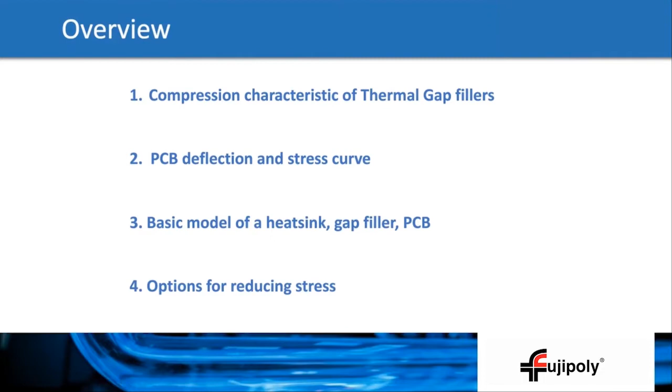Whenever we discuss thermal interface materials, it's always good to define what exactly is a thermal gap filler. Thermal gap fillers are a thermal interface, but they're unique from something like a phase change or a grease. In the case of phase change and grease TIMs, these are basically designed to reduce contact resistance only. A thermal gap filler is designed to fill in a gap that can vary due to tolerance. This means actual stress created during the compression can vary, and in most cases can be higher than desired.

Gap fillers are typically not used in applications with a fixed force like a spring-loaded heatsink. They are used in applications where there is a gap. The gap is controlled, and there is some tolerance based on the component and assembly tolerances. The actual load or stresses are dependent on the actual gap filler used, specifically the starting thickness. General rule of thumb is the higher the conductivity, the less compliant the gap filler. That being said, gap fillers can come in a variety of form factors, but all have some limitation and characteristics that should be understood.

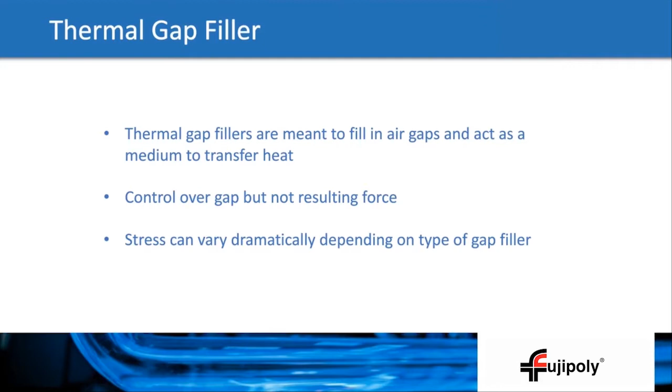Generally speaking, thermal gap fillers come in three types. The softest of these are the dispensables, or what are also called form-in-place materials. Form-in-place materials are an attractive option because they're essentially a fluid or a viscous material. They create virtually no stress. And I say virtually no stress because even they have their limits as to how thin you can go.

These dispensables can come as a curing or non-curing type. Curing types are essentially one or two parts, and they either cure at room temperature or they can be cured at higher temperature to reduce the cure time. Customers are responsible for the mixing in the case of a two-part and for the dispensing.

Dispensable gap fillers require equipment and procedures put in place to ensure the form-in-place is cured properly, if it is a curing type. Some materials don't require curing. Dispensing procedures must ensure no air is trapped in the material and that the correct dispense shape is created before assembly to ensure even contact.

One popular dispensing shape is what's referred to as a Hershey kiss. This dispensing tip starts off close to the surface and lifts as it's dispensed to apply what exactly looks like a Hershey kiss. Of course, the actual geometry of the dispensable material will depend on the application. There are also current limitations on the conductivity of dispensable type gap fillers.

Another popular type of gap filler is what's referred to as a putty or a putty pad gap filler. These gap fillers come in a pad form, so no need for any special equipment. These pads come in a specified thickness, and because they are already formed, there's no concern with air trapped inside like you would have with a dispensable material. They are more of a viscoplastic material. They tend to have a very small to no elastic component. This means there's no bounce back. The plus side is it can be pressed well beyond the 50% mark as opposed to some viscoelastic materials.

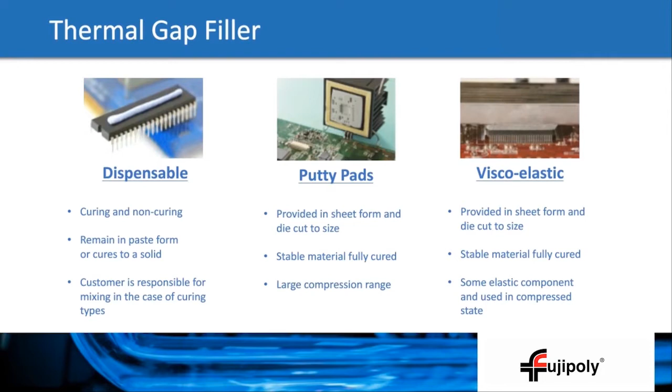If you made the decision to use a thermal gap filler in your design, the data sheet is typically where you'd want to start. Data sheets will typically have a stress strain curve or some stress strain data in a table or modulus value. Oftentimes this data is only for one thickness. Stress strain will change with the thickness. Thicker materials tend to be more compliant. The thicker you go, the more area there is for the material to deform. Another key point to bring up about the stress strain curve is that they are not linear, at least not for the range of compression most customers are working in.

Other factors to be considered when looking at a data sheet is the rate of compression. Gap fillers are highly dampened, so the rate of compression will play a big part on the peak stress. Stress is at its highest when the pad is undergoing compression and begins to relax immediately after. Communicating this to the manufacturing team is very important.

Boundaries also play a big part. Compression testing often uses platens that are the same size as the gap filler. This means the material will deform and will be forced outside of the load path. If the surface compressing the pads are larger, then the pad will require more force to get to a given compression. This is one reason you will find that the data sheet varies from the actual. You want to have a good understanding how thickness, compression speed, and relaxation over time plays a part in the stress on the PCB, especially when you're looking at very sensitive devices. So let's look at some stress strain curves for some typical thermal gap filler materials.

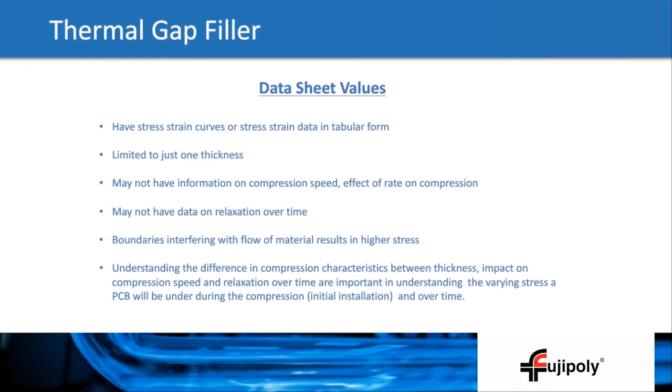On this slide, we can see the stress strain curve of a thermal gap filler. On the right, you can see the platens used to perform the compression testing. As I mentioned previously, the platens are the same size as the pad. There's nothing wrong with this test. It's an actual ASTM test, specifically ASTM D575. But unless you have an application where the top and bottom surfaces are the same size as the pads, you will see the stress strain curve diverge, typically about 30 to 35% compression. This is due to the fact that the gap filler in your application will remain in the load path and will require more force to get to a given compression.

Something else about the stress strain curve is the fact it's not linear. So using a single modulus value to describe the compression will often be inaccurate. You want to know where on the stress strain curve you will be working. Compressing beyond that point will cause the gap filler to densify and cease to flow. At this point, it's essentially a rigid material.

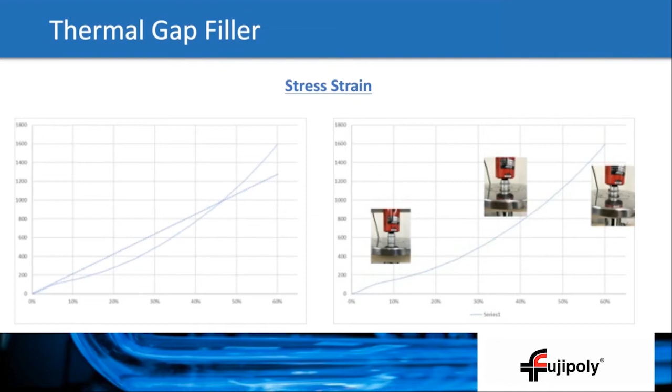Previously, we mentioned that form-in-place gap fillers are very popular because they do not create too much stress. They are a great option for very sensitive devices or assemblies that require very low stress. The stress created by a form-in-place is often negligible. They are polymer-based, usually silicone or some other synthetic polymer base, but they are not cross-linked or have very little cross-linking, so they have no tensile strength.

For TIMs like grease, the particle size tends to be much smaller. This is why you can go to very thin bond lines with materials like thermal grease. Unlike gap fillers, the limit to how thin you can go has little to do with the original thickness you start with. Most form-in-place materials will specify how thin you should go. It is important to know the limits of these form-in-place materials. Form-in-place materials may give the impression they are essentially totally compressible down to almost no bond line. This is not the case. Using them in an application that is very sensitive to stress and compressing it beyond the point where the particles are bottoming out will lead to damage to the PCB and the components.

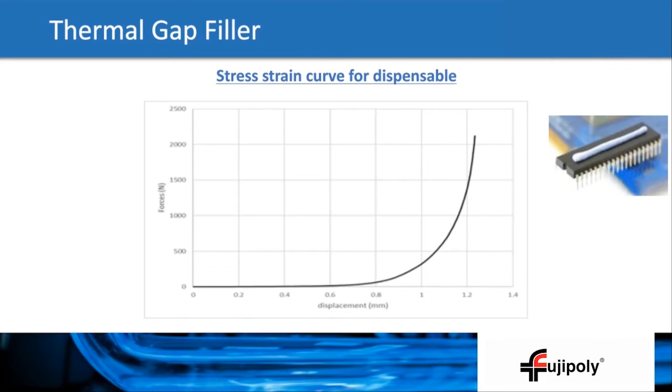In a lab environment, keeping the compression speed low might be okay, but in a production environment, that might not be an option. One of the first things we ask customers when they comment on stress created during compression is what speed is the pad being compressed at? Is it controlled? If it is not, can it be? If it is controlled, can we slow it down? Slowing the compression down usually fixes the problem, but in some cases it is difficult to control the rate of compression. Any procedure changes to address this usually means slower throughput for the manufacturing team.

Another option is using a fixed load to compress the gap filler. Gap fillers under a given load will creep. The creep in viscoelastic materials is reversible to a certain extent. There is some compression set, and the amount of set will depend on the type of gap filler. Putty gap fillers have a creep that is not reversible. The compression set is essentially 100%. Putty pads are not reworkable. Once they are compressed, they should not be reused if there is some rework. Even viscoelastic pads should be replaced if there is service required.

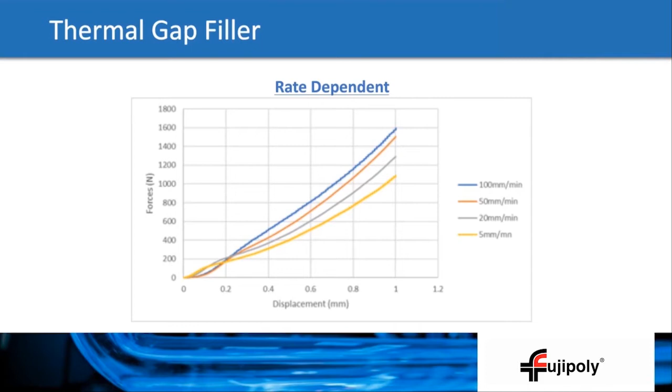Important to remember the forces are highest during the compression and generally relax once there is no longer any further deformation. Managing the compression from initial to the target percent compression is critical in ensuring the assembly does not undergo more stress that will cause damage to the PCB or solder joints.

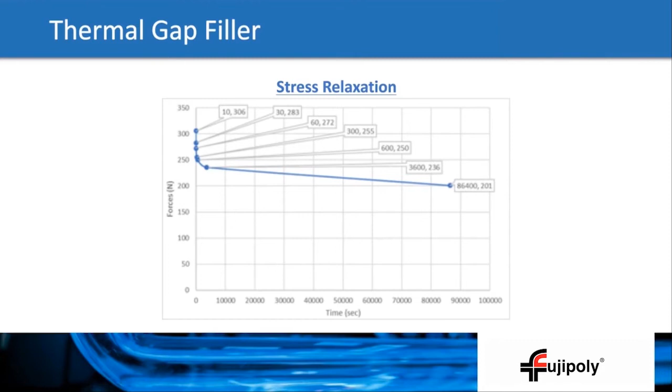We spent some time discussing the compression characteristics of thermal gap fillers, but in all our discussions we considered the compression surfaces rigid. Basically, metal platens that would only deflect under very high loads, far above the loads that are produced by a gap filler material under compression. Of course, if we are interested in the compression characteristics of an elastomer, we want to make sure we are not introducing deflection from the test system itself.

But the reality is that most gap fillers are compressed onto a PCB, and PCBs are very flexible. In fact, many customers are surprised at how easy it is to deflect a PCB, and fortunately how much it can deflect without breaking. PCBs, for the most part, except for specialized PCBs for microwave applications, are made of a woven fiberglass and epoxy resin. Mechanical properties can change based on the supplier, but generally speaking, an FR4 PCB can bend quite a bit before you reach the yield point.

The details on how and when a PCB will break are beyond the scope of this webinar. Your PCB supplier would be better suited to answering those questions, specifically on flexing and yield strength. In the case of this test, we decided to illustrate the flexing by doing an application-specific test to see how much a single FR4 board will deform. This is something a customer can easily do as well.

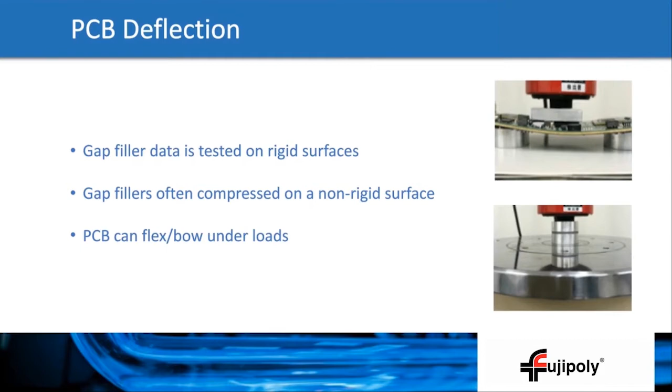For this example, we had PCBs made using FR4 that is 060 thick, about 1.5 millimeters, and a standard half-ounce copper ground plane. We did not populate it with components. In this case, we're just focusing on the deflection of the PCB only. The components are obviously the critical part of any PCB, but the type of components and layouts can vary from one application to the other, so it was very difficult to standardize.

There's always concern with localized stress on the solder joints. We often find the deflection of the PCB plays a big part in solder joint failure. The rigid solder joints cannot flex along with the very flexible PCB. This creates stress strains that can be difficult to predict even with advanced modeling.

In this experiment, we did a basic 4-point test. The PCB is held by standoffs spaced at 100 millimeters by 100 millimeters. We use a 27 millimeter by 27 millimeter platen to act as a sort of dummy component. We record the stress strains similar to how we tested the gap fillers in the previous slides, with forces along the y-axis and deformation along the x-axis.

In this case, we targeted about a 2 millimeter deflection. We certainly could have deflected it further without actually reaching the yield point. We felt a 2 millimeter deflection is good enough for illustrating the amount of deflection you're going to see in a printed circuit board.

As you can see from the stress strain curve, the PCB flexes quite a bit. The curve is linear, at least up to here, and it doesn't look like we're anywhere near close to damaging the PCB itself. With only about 90 newtons, or about 9 kilograms of force, we get up to about a 2 millimeter deformation. In a gap filler application, the compression is a stackup of a flexible PCB and a compliant thermal gap filler. The question may be, is this too much force?

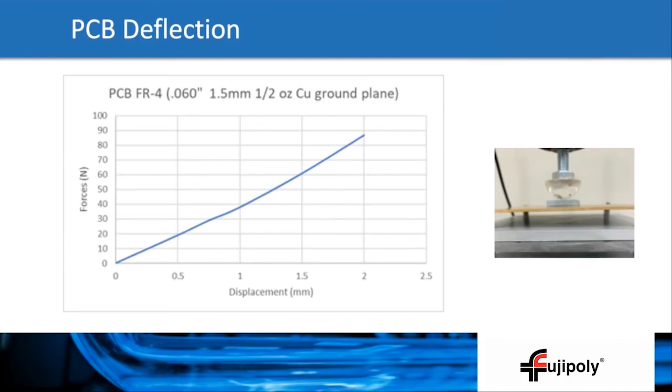So now let's take a look at the pad we're intending to compress onto the PCB, and let's look at its compression characteristic on a rigid surface, just like you would get if you compressed it using an Instron tester, or if you called us here at Fujipoly and asked us to do a compression test. Basically, a compression curve of the gap filler onto a rigid surface. We're using the same size and compression speed as a PCB test.

What we are seeing is that a very flexible PCB compared to the gap pad will dominate. So the pad is undergoing very little compression, but the PCB is still flexing quite a bit. It's almost like the gap filler itself is quite rigid. This means we're not getting down to the target compression that we intended. Not getting to that target compression is not a big concern unless there was a specific thermal resistance at a specific percent compression, but deformation in the PCB is the primary concern.

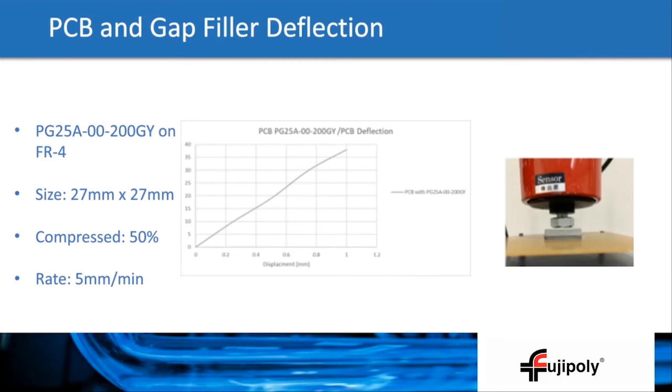We mentioned earlier that gap fillers will creep under load or exhibit relaxation at a given gap. This means the PCB will return somewhat. How much and when will depend on the gap filler's relaxation characteristics. For some gap fillers, it may not relax at all. In some cases, it may come close to, but unlikely the PCB will return to its original position. If you know the relaxation loads for the pad, you can match it up to the PCB and get the actual final resting point for the PCB. For example, if you know the pad after 24 hours will go from 150 to 50 newtons, you can figure out just where the PCB will finally rest at.

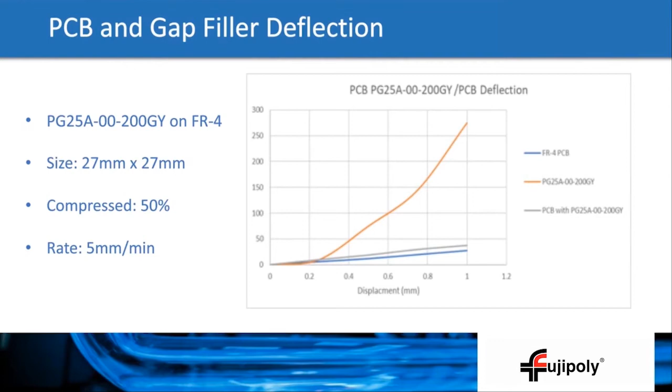Of course, this could be avoided somewhat. Planning and ensuring the standoffs are closer together will provide more support for the PCB. So we decided to try this again. This time we moved the standoffs to a 50 millimeter spacing. For a very simple test, this was easy to do, but if you have a populated PCB that is ready to go into production, this might not be an option.

Boards are packed with surface mount components and traces that are designed to maintain signal integrity at higher frequencies. Laying out a PCB is a time-consuming process. Sometimes it's not as easy as moving a BGA over 10 millimeters to accommodate a through hole, or rerouting a trace around to allow for a post to be inserted. This is why it's really important to identify components that will require thermal gap fillers and ensure they can support the compression of the pad.

In the previous example, the standoffs were 100 millimeters by 100 millimeters apart, and gave us 2 millimeters of deflection with only 90 newtons of force. This may seem extreme, but standoffs that are even farther apart are not uncommon, nor is having a PCB flex as much as 2 millimeters or more.

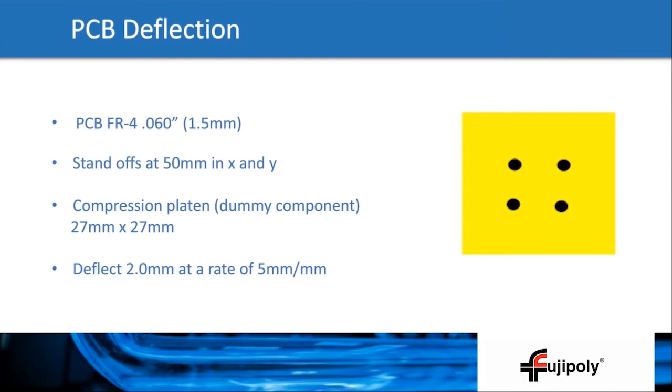So we ran the same test on that PCB with the closer standoffs. Again, it's 0.060 thick, about 1.5 millimeters, and a 1/2 ounce copper plane. We used the same platen and size, same rate of compression. Decreasing the spacing had a marked impact on the deflection of the board. The PCB under 700 newtons, or about 70 kilograms, now deflected 2 millimeters. If we get the standoffs even closer, the boards will deflect even less at a given load. Ideally, we would like to see the deflection be 0, but that's just not possible.

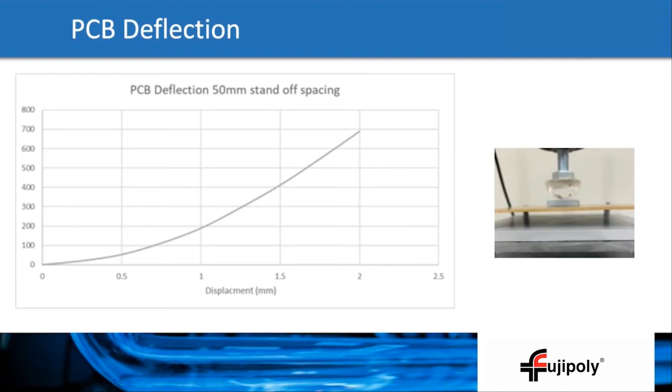The PCB is still under a lot of stress. So are the solder joints. The standoffs are also under a lot of stress. So basically anything in the load path is going to be strained. Managing the deflection on the board is critical. That starts with understanding the characteristics of the PCB and the thermal gap filler.

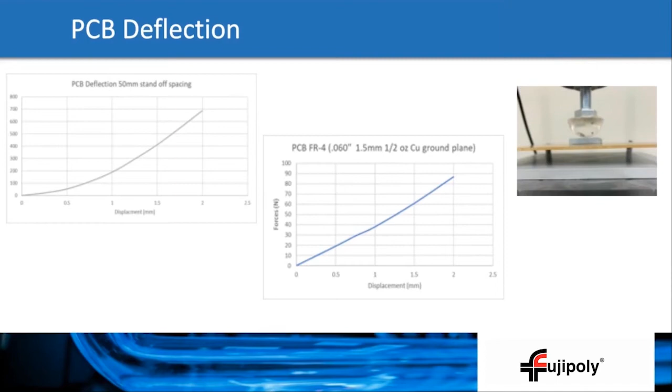As you start to understand the deflection and compression characteristics of the PCB, we can perform some basic analysis on the stack-up. We can do this by creating a spring and dashpot equivalent of the PCB and gap filler. The spring and dashpot are very common when analyzing viscoelastic materials. The spring component is the elastic component. This represents the constant stress created during deformation. For example, a rubber band, or as the name implies, a spring that is stretched or compressed.

The dashpot represents the viscous or rate-dependent component. When we discussed gap fillers earlier on in the webinar, we talked about relaxation and how the speed at which we compress the gap filler will impact the stress created. This is represented by the dashpot. A single dashpot and spring, as seen here, is a Maxwell model, but there are other models that use the same dashpot and spring model.

All of them are suited for understanding the behavior of different types of materials. We can also look at them in parallel for constant loads to get a better understanding of the creep of an elastomer, while the Maxwell model is better suited for understanding the stress relaxation for a given strain, similar to how a gap filler is used.

Unfortunately, the compression characteristics of a gap filler can be a little complicated. Thermal gap fillers are polymers that are highly loaded with fillers. The movement of the fillers, along with the viscoelastic and viscoplastic behaviors of the polymer, make them difficult to model accurately. In some cases, though, generalizing them as a simple spring and dashpot is usually good enough to get a good understanding.

So if we look at the components of our PCB and gap filler stack-up, we see that they are quite different. In the case of our PG25A, which is a very soft gap filler, the elastic component is quite small, but there is a large viscous component. What that means is the force required to compress the gap is higher than the force created when we keep the pad in a deformed state.

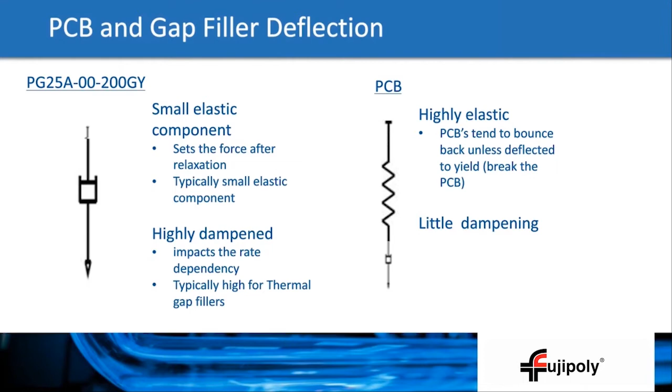In the case of our PCB gap filler stack-up test, we would look at it as a series of dashpots and springs. If we were to give these components values, the compliance of the PCB would definitely dominate. The PCB would flex under much lower loads. The gap filler's time-dependent component would mean it would require much higher force to compress compared to the PCB. In this case, the PCB elastic component would be reacting to the rate-dependent component of the gap filler.

Of course, since the rate dependency means the force will eventually relax over time, it will balance out with the elastic component. If you are inclined, you can create a nice differential equation that describes the relations of stress, strain, and time.

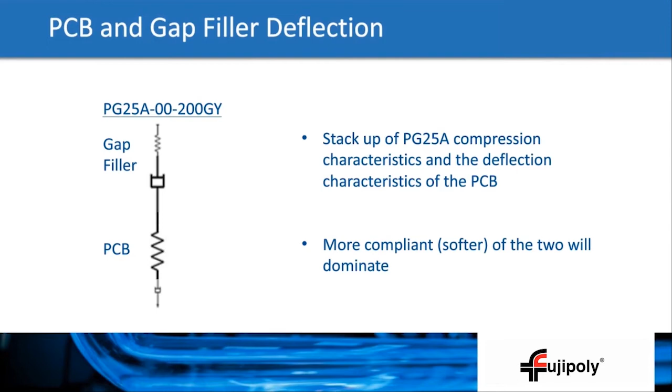If we look at the compression curves we saw previously, we can see how the individual components impact the overall compression of the stack-up, with the PCB having a high elastic component and the gap filler having a high dashpot component, representing the rate dependency of the gap filler pad. This method of analysis is a helpful way of looking at the stack-up. The downside is that the data required to create a detailed model is usually not available on a data sheet, and even for us to manufacture it, it's difficult to characterize in detail. Visualizing or having a relatively good approximation is still better than trial and error.

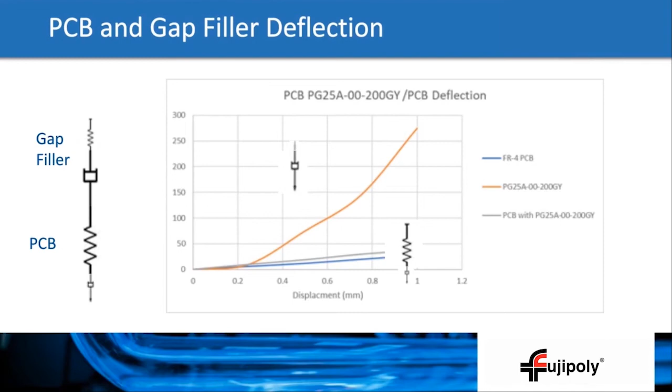The takeaway from here is that the compression of a gap filler in a PCB is not just a matter of a stress-strain curve on a data sheet. As we discussed earlier, the compression of the gap filler is not linear and highly rate dependent. The PCB, which is often ignored until there is some failure, is not rigid. In a real-world scenario, the gap filler in an assembly is not compressed anywhere near the target percent compression. Sometimes you may even think the force required to compress the pad was less than what was published on the data sheet. But what is happening is the PCB is simply flexing, giving you the impression the pad is deflecting under less load than anticipated. A difficult thing to observe when your assembly is enclosed, and there is no way to visually see that.

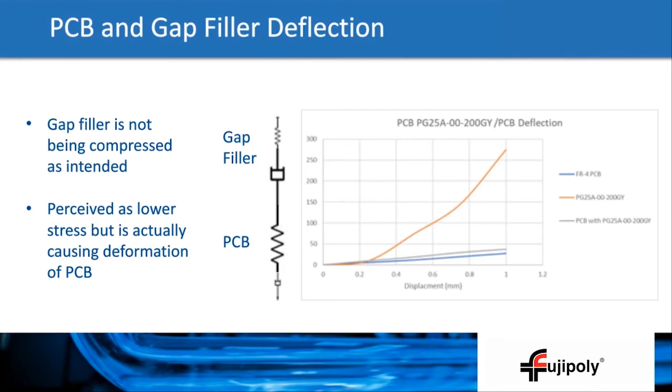Something else you can do is to look at the stack-up as a sort of pseudo-spring constant. I say pseudo-spring constant because in this case we're lumping together the rate dependency and the elastic component into one constant. To do this, we have to know the rate of compression, but that is easy to do with the datasheet value. And if you can get a spring constant for your PCB assembly, you can create an equivalent spring constant for the entire stack-up. The spring or K value of the PCB can be one value or constant since it is linear, but the gap filler will be some function. You can add the compliance of the two and create a type of superposition where the sum of the compliance gives you the overall or equivalent stress-strain. In our example, the PCB was just so much more compliant than the gap pad that we would not see much of a difference. In a different scenario, the sum of linear constants of the PCB and the nonlinear curve of the pad would give us an idea of what compression actually would look like.

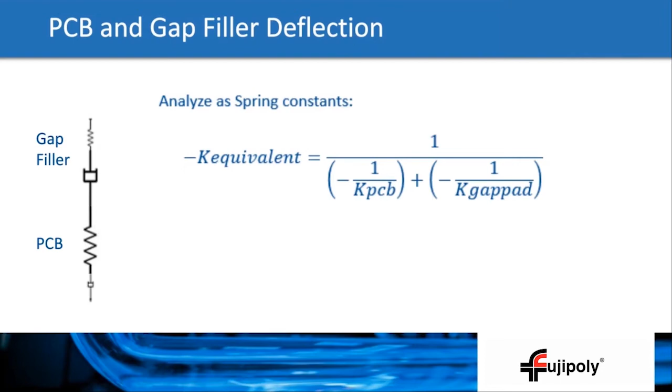We discussed both elastic characteristics and rate dependency, but I did want to dedicate one slide to the rate dependency of the gap filler. We find this overlooked or not understood. One big takeaway is that the compression of the gap filler, or the stress created during the assembly and compression of the pad, can be managed by the speed at which the gap filler is compressed. Often, reducing the rate of compression will substantially reduce the stress. The faster you try to compress the pad, the more force you will create. This is a very important thing to keep in mind. The pad will relax and the PCB will bounce back at some point, but the damage may already have been done.

The datasheet should have relaxation data. You may see this as a curve over time at a given percent compression. This can also be forces after 1 minute, 5 minutes, 1 hour, etc. The relaxation force is an indication of how soft the pad can be. If you see that the force after 1 minute at 50% is much lower than the initial force at 50%, then there's some room to reduce the stress by simply reducing the rate of compression or using a fixed load that will compress the pad to a given gap over time. If the forces are equal, that is usually an indication that the material is highly elastic. If that is the case, controlling the speed won't do much for reducing the stress.

Gap filler materials usually are not highly elastic relative to the rate dependency component. In fact, if you take a viscoelastic gap filler and compress it with your fingers, you'll see it will slowly return to its original shape over time, but that may be several minutes. Putty pads, on the other hand, won't bounce back and are more viscoplastic than viscoelastic. Either way, they will still have a rate dependency, and a putty pad that is compressed quickly will be difficult to differentiate from a non-putty pad.

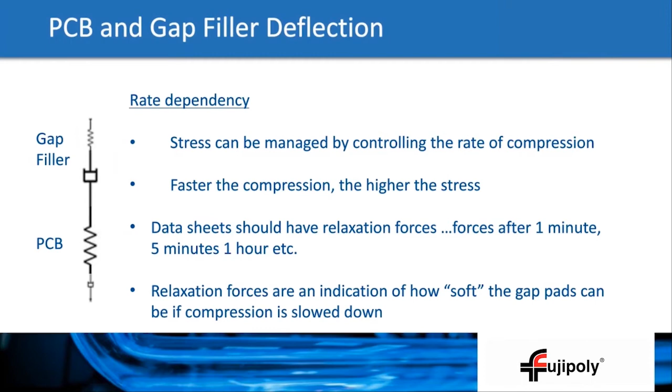Managing stress and strain is critical when using a thermal gap filler, especially gap fillers that are higher conductivity. This is due to the high level of loading that makes them just less compliant. One of the best practices is to identify components early on in the design, preferably before the PCB is laid out. Once the board is populated, placing through-holes for support can be difficult or require big changes to the PCB layout.

When you have selected a pad, try to get a good understanding of the compression characteristics of the pad. At our engineering center, we do offer testing of pads at the specific size, boundary conditions, as well as the rate. This data is very helpful to understand the stress created during assembly and the stress over time. Creating standoffs and supports around the components that will require a high-performing gap filler is always a good idea. This is the simplest way of reinforcing a PCB.

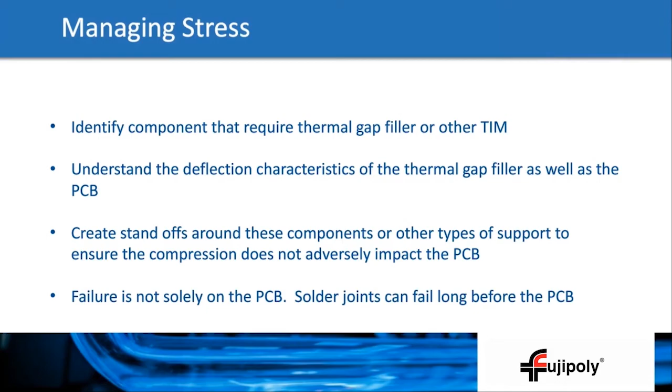So, yeah, I actually have a couple of questions for you as well, but why don't we start by you showing us maybe a couple of samples. We actually already have some questions, and I think we'll probably be able to answer this gentleman's question about elastic deformation. If you can show us maybe a couple of samples.

Sure. So one of the things we're pretty good about is making sure that our customers have access to samples. We understand how important it is to just take the material and put it in the application and actually try it out, regardless of what's on the data sheet or what test data we give you. So we do offer these really nice sample kits. They're pretty well loaded with a pretty good assortment of gap filler materials.

They range from fairly low performing materials to, this is a GR45, which is pretty good performance, about 4.5 watt per meter Kelvin. We also have GAE materials, and I apologize, I pulled this material out to give you a little bit of an example of the different form factors they come in. We have fairly low performing materials, and we have materials as high as 13 watts per meter Kelvin. We also have dispensable materials, which are form in place. We talked a little bit about that during the presentation as well.

Unfortunately, we can't put everything in the sample kit. We have probably close to a dozen different, if not more than a dozen different gap filler formulations. Within those formulations, there's a couple of variations. We actually can apply a hardened, chemically treated hardened surface onto them. We can also apply a mesh, which is actually quite useful for very thin gap fillers that are very soft.